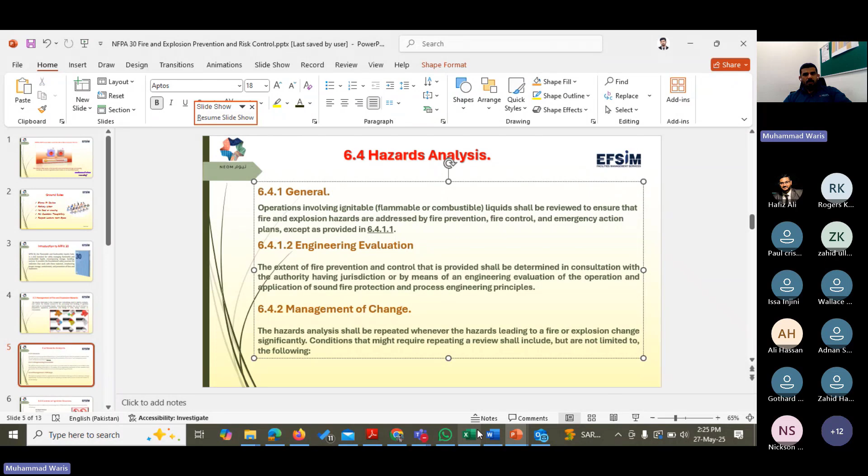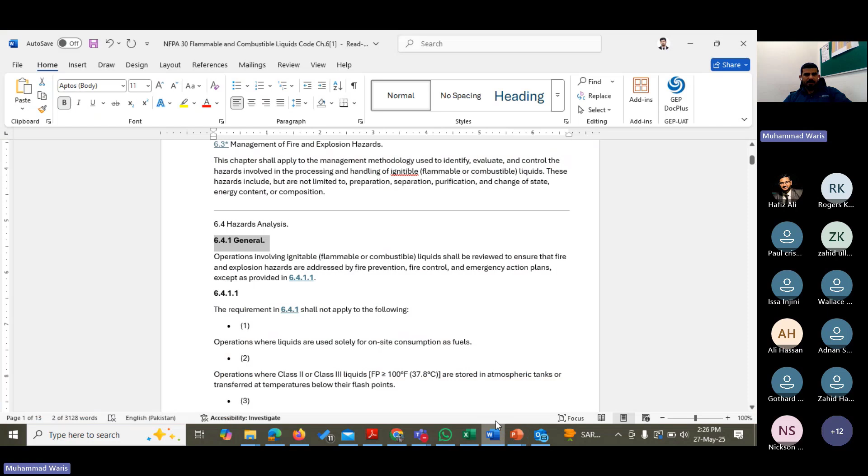6.4.1, General Hazard Analysis. We go to the book. Here is general hazard, 6.4.1. If you go to this point, you just click it and it will take you here. Okay, these are the requirements for this general hazard. You got it?

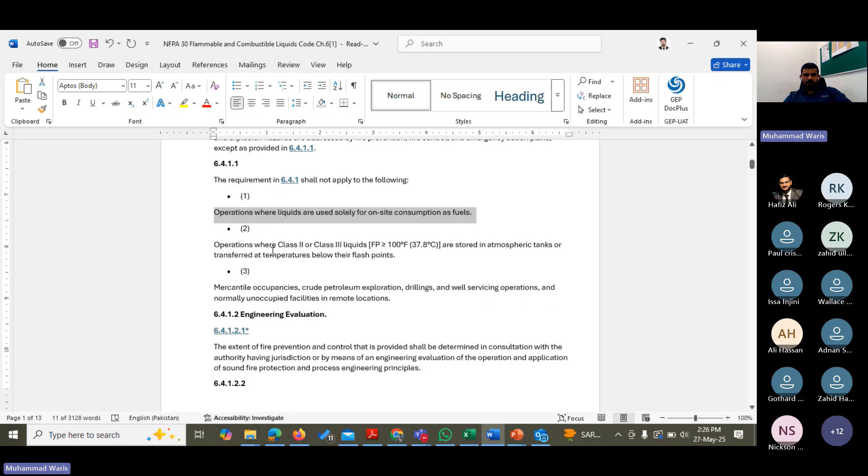So every table and flow we can understand from this, in every NFPA code, not only for 30, for every NFPA code.

Engineering evaluations: the extent of fire prevention and control that is provided shall be determined in consultation with the authority having jurisdiction, or by means of an engineering evaluation of the operation and application of sound fire protection and process engineering principles. I mean, the hazard analysis and engineering evaluation should be done before construction. There is a plan for protection systems, identification, risk assessment—each and every should be done judiciously and on engineering evaluation, because they have to make the plan for hazard analysis.

And this also impacts on something notorious. We received a message from an HSE manager that his client says we need to install a fire damper in our kitchen. Is it required or not required?

Now, this is engineering evaluation—this thing should be installed during construction. That's why engineering evaluation always impacts accidents and also impacts prevention. If there is an incident because of this fire damper, then this should be considered an engineering failure. You got my point, hopefully.

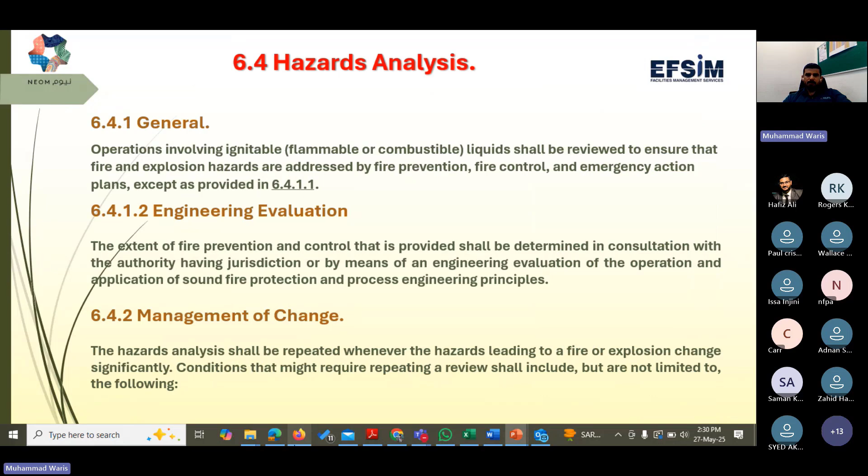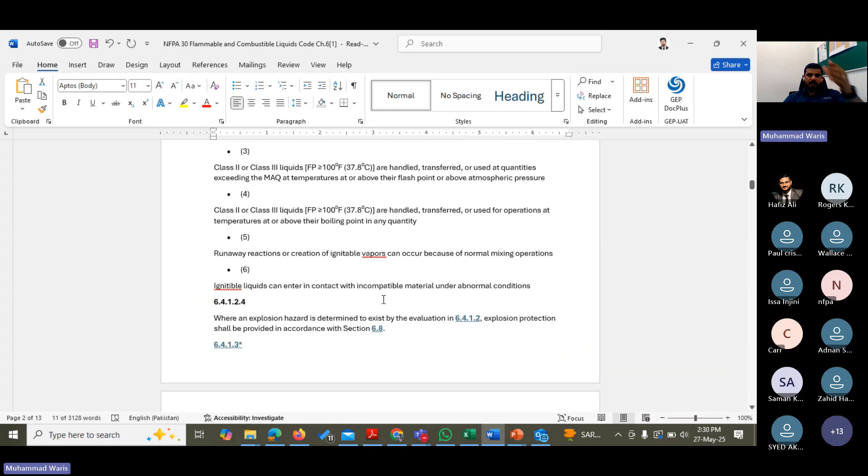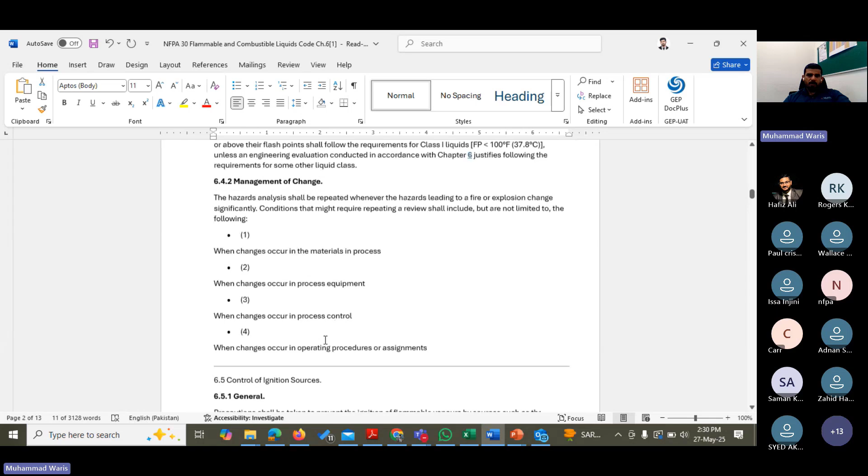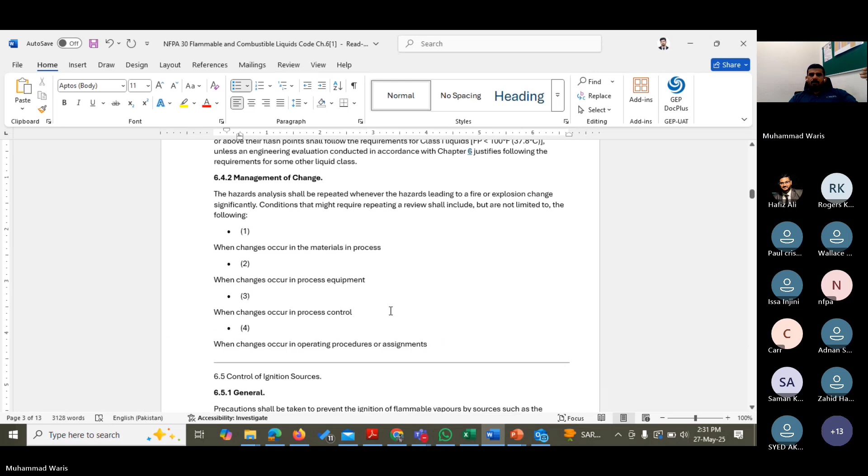Management of change is when change occurs in the material, process, when change occurs in the process equipment, when change occurs in the process control, when change occurs in the operational procedure and assignment. If change occurs in these things, there should be an impact on your industry, your hotel, and your control of ignition sources.

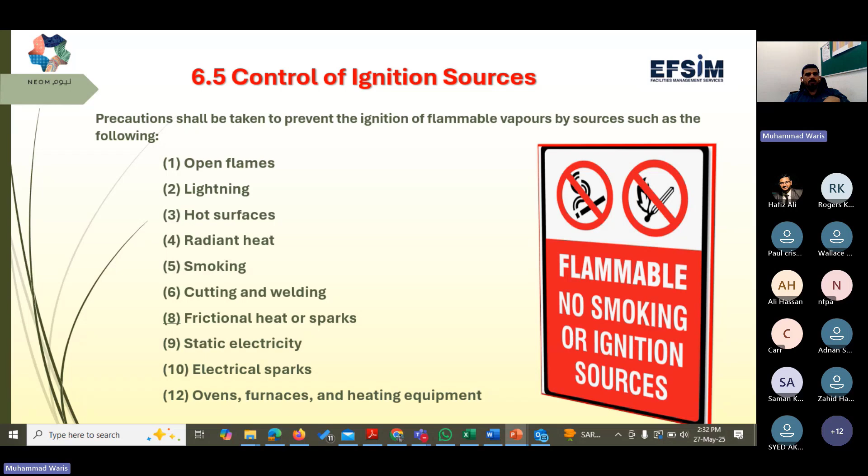How can we control ignition sources? What are the precautions taken to prevent ignition of a flammable vapor by sources such as the following: open flame—we have to control the open flame. You have to know where open flame has been trimmed, like for job work, stoves, kitchen areas, lightning, hot surfaces, radiant heat, smoking, cutting and welding, frictional heat, friction or spark, static electricity generated by friction, electrical spark, ovens, furnaces, and heating equipment utilized in different places. These are all the things we have to control as sources.

What is hot work? If anyone doesn't understand: welding, cutting, and every work regarding hot work—welding, cutting, and similar spark-producing operations—shall not be permitted in areas containing flammable liquids under 37 Celsius until written permit.

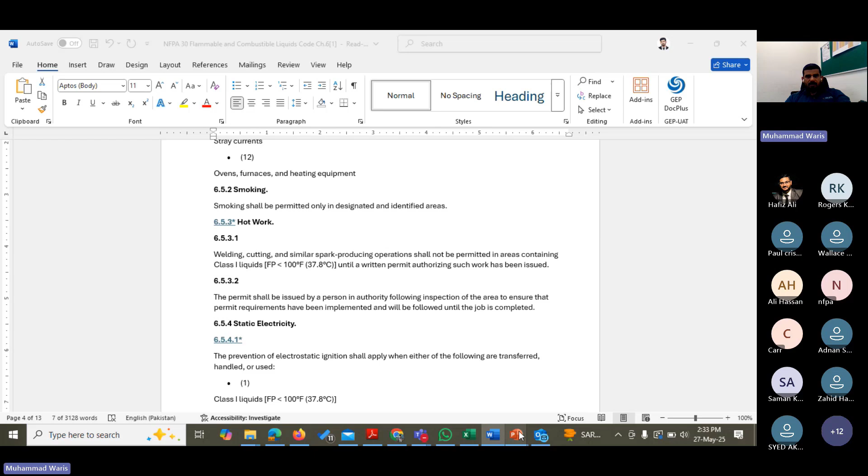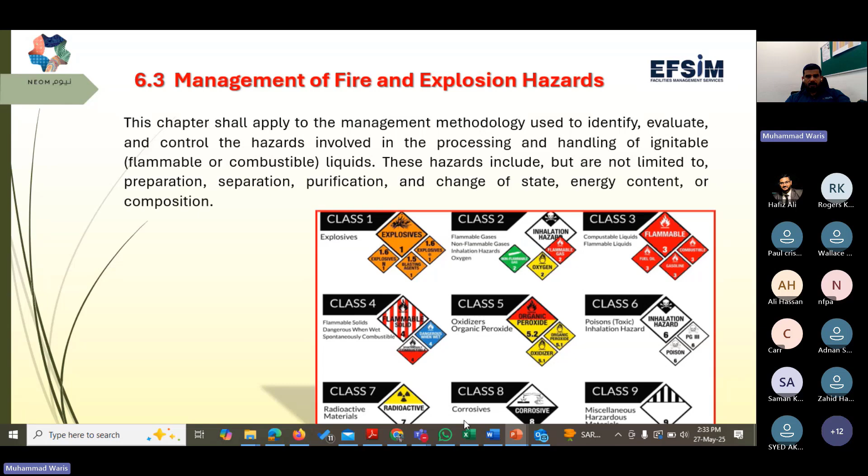So, if you want to learn about the table, this is a very good example in front of us. Just click on—which one? Class 1. So this is Class 1, Class 1 liquid.

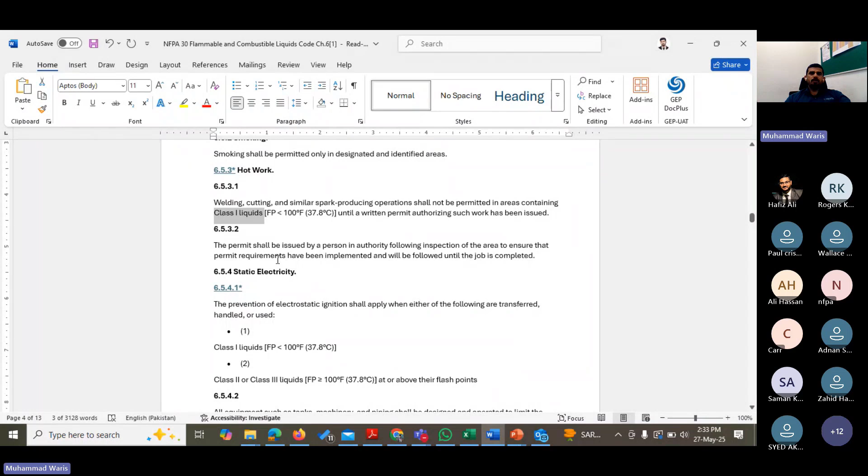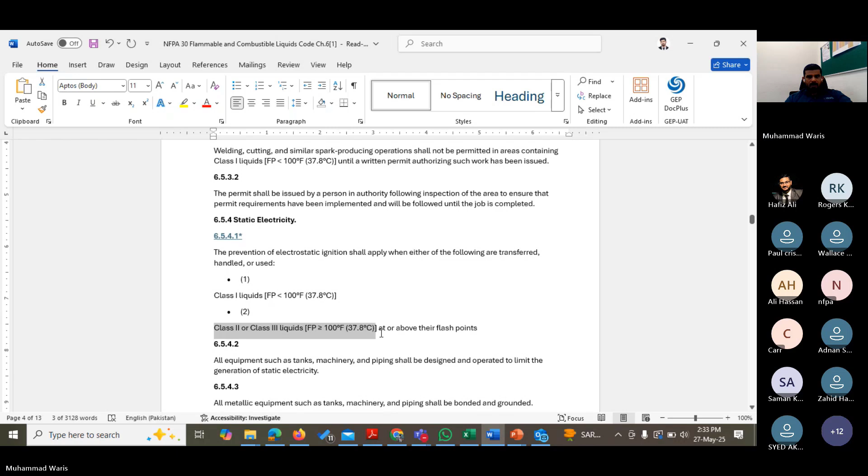All explosive, combustible, and flammable liquids are divided into 9 classes. These 9 classes can be used everywhere, not only in America, but all over the world. Same here, he shows you Class 2 or Class 3 liquids are above their flash point. You have just seen, sir, hand there, right?

Sir, kindly give us some examples of static electricity.

We have equipment such as tanks, machinery, and piping which shall be designed and operated to limit the generation of static electricity. Static electricity is found in areas where mostly metal has been utilized, so the metal used in these areas should be protected. Equipment like machinery and piping should be designed and operated to limit static, or we can go with PVC.

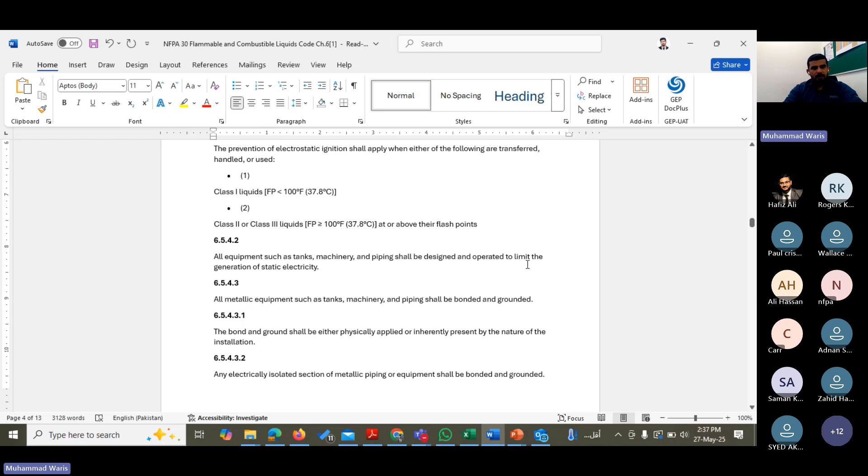Detection and alarm system and procedure. Remember we are discussing only flammable and combustible liquids. This topic only covers NFPA code 30, flammable and combustible liquids, handling, procedures, safety, and their prevention. So for these flammable and combustible liquids, what kind of detection system do we install? I have a question here: can anybody tell me what is the best detection system for flammable liquid and combustible material?

We are now on the slide about detection and alarm systems and procedures. Now we are going to prevention systems for flammable liquid and combustible materials. What is the best extinguisher system for flammable liquid and combustible materials?

Sir, we can use DCP, dry chemical powder. No, no, no, you have to answer only one, sir, choose the best one.

Sir, if flammable liquids and combustible materials are stored in a closed container or warehouse, we may install a sprinkler system like FM 200 gas or other water sprinkler systems for combustible materials, and for flammable we use FM 200 gas, which is environment friendly and extinguishes the fire by cooling.

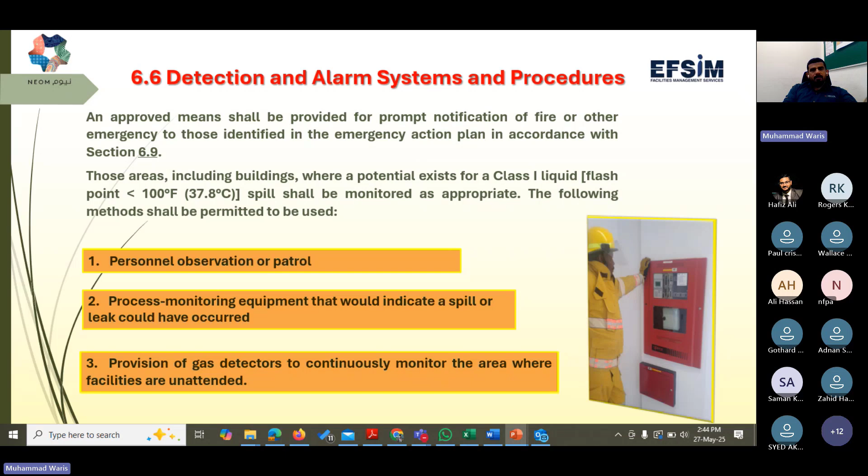So these are the steps: first of all, personnel observation, meaning you have manpower, you send a person to visually check everything out. Install process monitoring equipment, because the gas detection system or smoke and heat detection system is the third or final method, which can only indicate when something is already going wrong, meaning gas is released, fire has happened, or smoke is initiated, so they can activate your alarm system.

Next topic is related to fire detection system. What kind of fire protection and suppression system do we install? Yeah, that is the question. We can also find your answer from this slide.

This section identifies and recognizes fire protection and fire suppression systems and methods used to prevent or minimize loss from fire or explosion in ignitable, flammable, combustible liquid processing facilities. The application of one or a combination of these systems and methods, as well as the use of fire resistant materials, shall be determined in accordance with section 6.3 and 6.4.

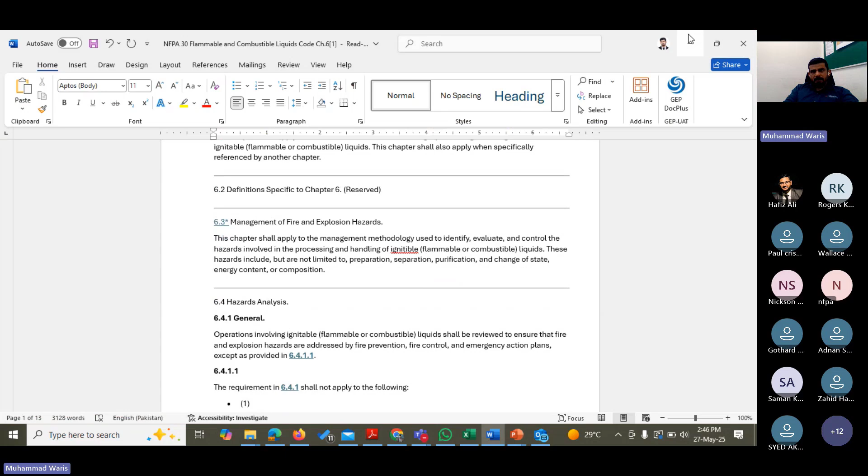What protection system can we install in that area that is suitable for that location? Section 6.7.2 says a reliable water supply or suitable fire control agent shall be available in pressure and quantity to meet the demand indicated by the specific hazard.

First of all, we have to understand the hazard - what kind of hazard and what kind of material is installed in that warehouse or location. I mean, there is some kind of chemical in that warehouse or industry or location. So, is water suitable for it? No, water is not suitable.

Is DCP suitable for it? No, DCP is not suitable either. So we have to choose the best extinguishing agent as per the type of class. Which class? I already showed you the table.

So this table is most important for you. You have to remember this table - what materials, what flammable liquids are in it, and what class they belong to. From that table, you know the reactivity, flammability, and toxicity of that flammable liquid.

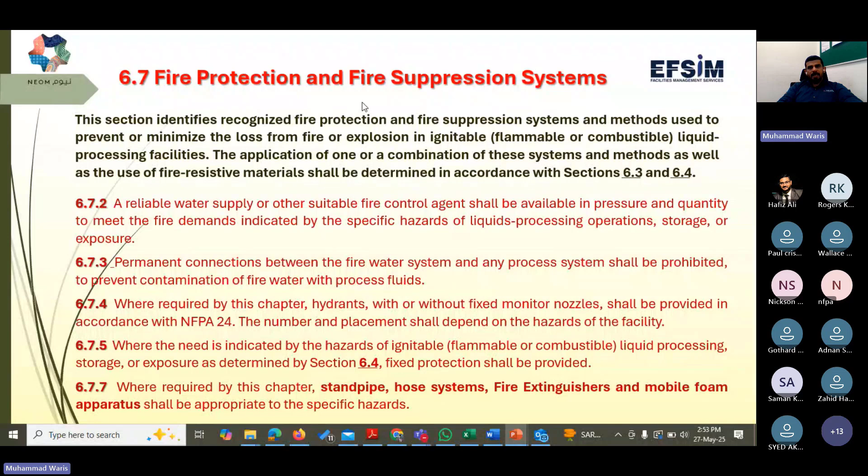You also have examples that a lot of persons died and nothing has remained of that industry. So this explosion protection system is a part of this industry that they should have to install. We are discussing fire protection and suppression systems, and this is also part of the fire protection systems. Industrial explosion protection system, IEP system - you can search it from Google, no problem.

Where required by the engineering evaluation specified in 6.4.1.2, or where otherwise provided explosion protection system, it shall incorporate one or more of the following methods of protection. And what are the following methods? You can check it.

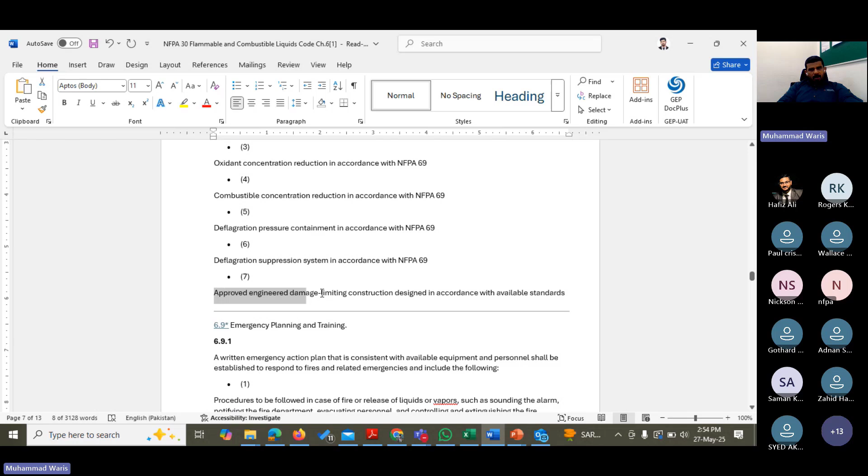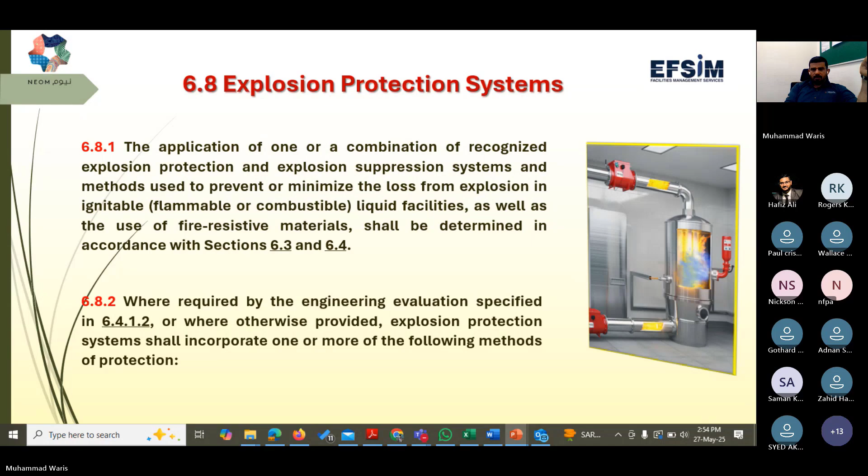When you are going to read NFPA codes, just remember one thing: we cannot add any word from our side. That was, you can say, the process of NFPA, or they don't want to share their internal information with anyone, any country. So maybe they have added everything with clause, with code, with table, because no one can change it itself. So we have to follow that code.

What kind of emergency planning and training do we need when we are handling, shifting, storing flammable and combustible materials? First of all, we have a written emergency action plan. Every industry, every multi-story building, every place must have a written emergency action plan - in case of emergency, what would they do?

That consists of availability of equipment and personnel established to respond to fire and related emergency. Like in case of emergency, what is the responsibility? Who is the person to evacuate that area? Who is responsible for the fire? Who is responsible for the gas leakage? Who is responsible for the water leakage? Who is responsible for headcount? Each and everything is written in that emergency plan. So what is the procedure? We have to follow these points.

Procedure to be followed in case of fire or release of liquid vapors, such as sounding the alarm, notifying the fire department, evacuating personnel, and controlling and extinguishing the fire. The procedure should include all these things.

Planning of effective fire control measures shall be coordinated with local emergency response agencies. When you are going to plan an emergency action plan, you should involve local authorities and industries. Like here we are in NEOM - in NEOM, we have an emergency action plan, but we have coordination with civil defense, with health ministry, with public safety, and with fire departments. In case of emergency, we coordinate with them.

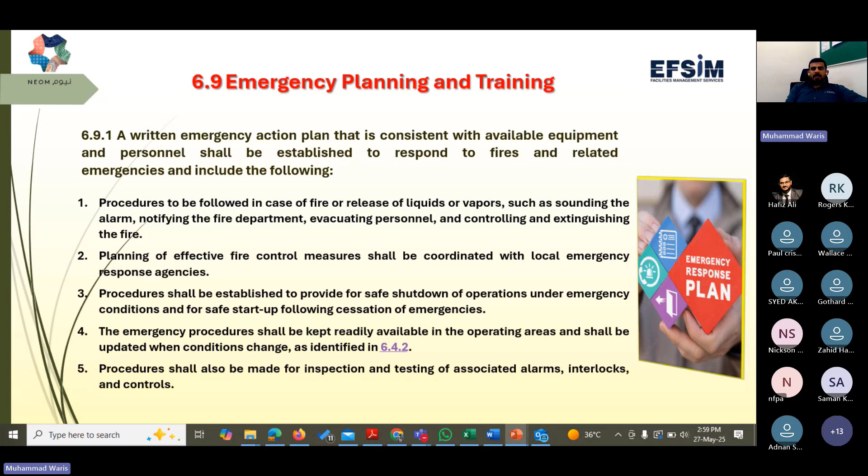Procedure should also be made for inspection and testing of associated alarms, interlocks, and control systems. There should also be a procedure that shows that monthly, quarterly, biannually, or annually, inspection, testing, and maintenance has been going on for all fire protection and firefighting equipment and procedure systems.

Inspection and maintenance, 6.10: All fire protection equipment shall be properly maintained and periodically inspected. I already told you what the criteria are for inspection and testing - like quarterly, monthly, or biannually.

So water-based fire protection shall be inspected, tested, and maintained. What is the point we are discussing? The point of maintenance and operating practices shall be established and implemented to prevent and control leakage and spillage of ignitable liquids - maintenance and operating practices. In case of spillage or leakage, what is the handling procedure?

Yes, please sir. First of all, if we have a spill or leakage, our first priority should be to save people, property, and the environment, and the methods we can use for this leakage or spill control.

That may be absorption, and blanketing or covering we can also use. After that we can make dams, diking, diversion, or retention as per the situation. As per the situation, this mostly impacts - what is the situation at that time?

What is the hazardous material we are going to handle? What kind of liquid has been drained? What kind of PPE do we require? What is the flashpoint of that liquid? Every point is most important, that we have to decide before we control and before we contain this liquid, okay.

Okay, thank you. These points mentioned here are regarding inspection and maintenance of the areas and locations where we install combustible and flammable liquids. You can read it, and if you have a query, you can ask the question later.

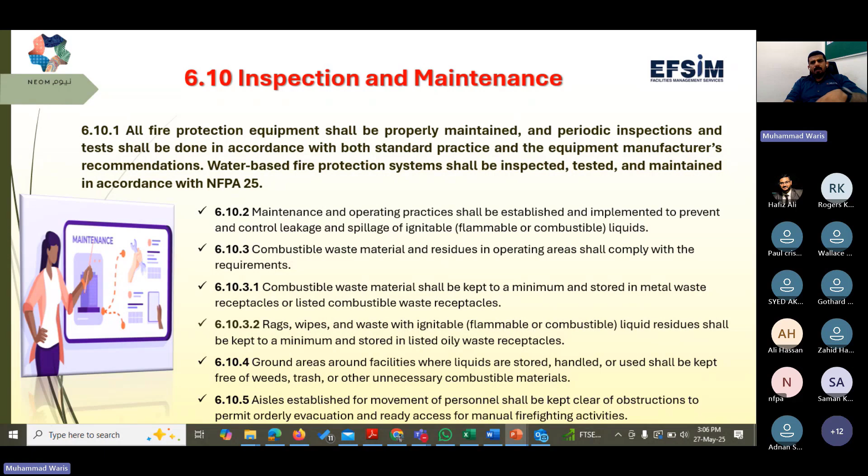This slide explains the drainages, where we can drain our chemicals, the extra chemical. We have a lot of examples in our country also, where chemical has been going to drains and canals, and everywhere, and seas also. You can see them draining into the sea, and water lines everywhere.

So in this slide we discuss that we cannot drain this liquid and chemical into our usable water, into our lines, or into our environment. Got it? Only designing that will control, decontaminate, and drainage that has been made specially for these liquids and these chemicals.

Design intent - what's design? The facility shall be designed and operated to prevent the discharge of liquid to public waterway, public sewers, or adjoining property, as determined by regulatory requirement and the requirements of section 6.12. That only be required and made for this liquid should be drained or discharged that way, not into the public waterway.

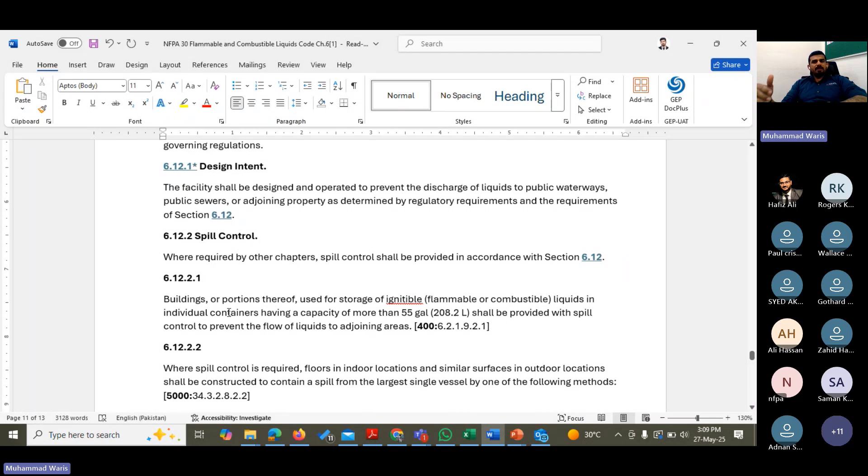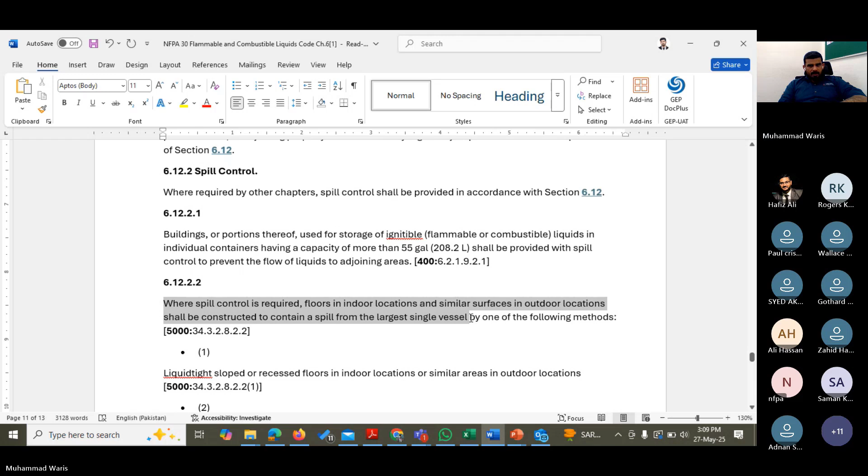Where spill control is required, floor in indoor locations and similar surfaces in outdoor locations shall be constructed to contain a spill from the largest single vessel by one of the following methods. So if we are going to follow the method, we can get this law and table from NFPA 30. You can only focus on the building or portions thereof that are used to store liquid, whereas the capacity of individual vessel exceeds.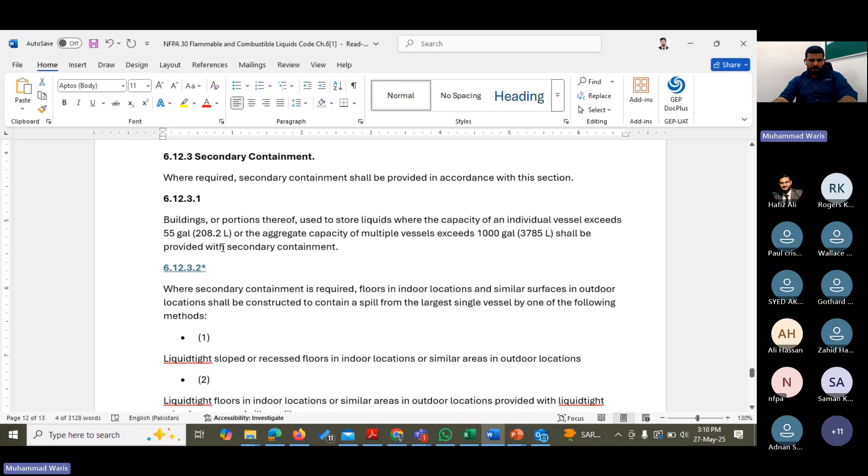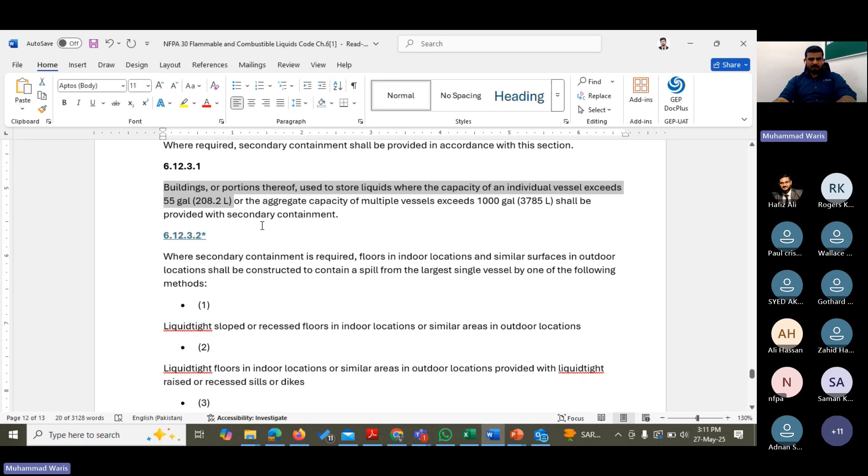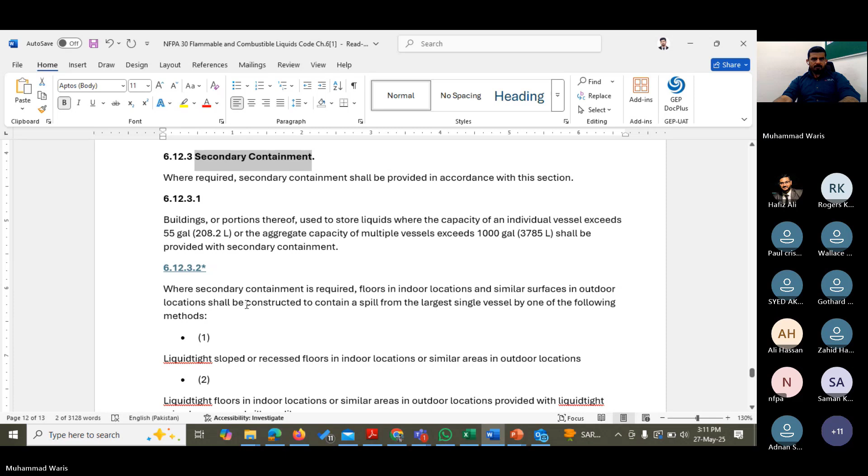We already discussed this, I think. Same is actually same for spill and same for secondary containment. Where secondary containment is required, floor in the indoor location and similar surface in outdoor location shall be constructed to contain a spill from the largest. These are the same methods used for the spill control and he's choosing for the secondary containment.

Drainages. If drainage is used, it shall meet the requirement of section 6.12, where a drainage system is used to remove liquid from the fire area. It shall direct liquid leakage and fire protection water to an approved safe location without creating any additional exposure hazard. Drainage system, he is choosing, he says that it should be a direct liquid leakage system. Fire protection water to an approved safe location, if there is no other link line with it, only that liquid line should be

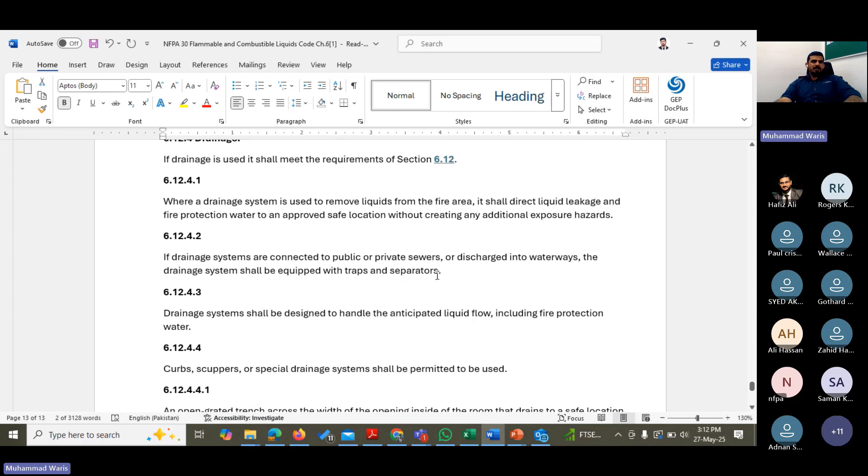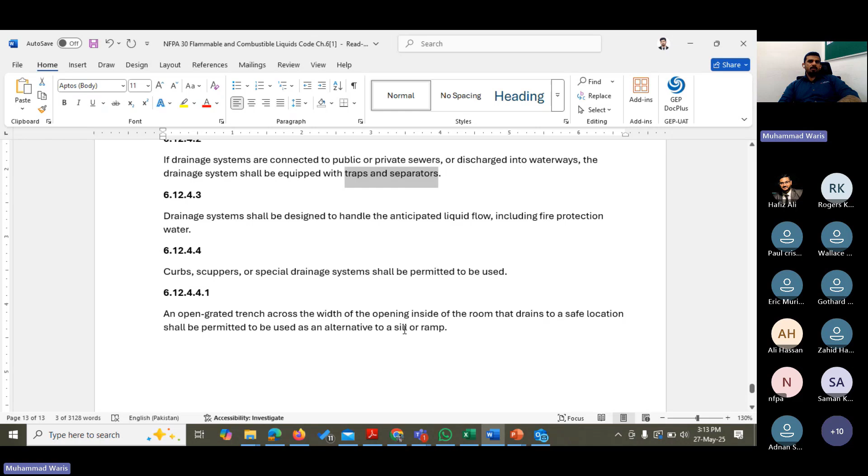extracted from that drainage. If drainage systems are connected to public or private sewer or discharge into waterways, the drainage system shall be equipped with traps and separators. There should be a different drainage system designed to handle the anticipated liquid flow, including fire protection water. Curbs, scuppers, or special drainage systems shall be permitted to be used. An open-grated trench across the width of the opening inside of the room that drains to a safe location shall be permitted as an alternative to a sill or ramp. These are the points for drainages.

In conclusion of this slide, again I'll tell you how we can drain the liquids and chemicals from our premises. In the industry we're working, there will be a lot of chemicals and wastage, chemical wastage and medical wastage. Sometimes also the drain wastage that has been contaminated with the chemicals and medicine. So the line should be different.

Line should be fire protected, different line from others. Do not mix with private lines and water supply lines and the government lines. If it is going to mix with them, there should be a separate line with color coding also. So this slide is covering only this portion. It's a little bit complicated, but please try to understand the wording, and if you have a query, please ask me, we can discuss it.

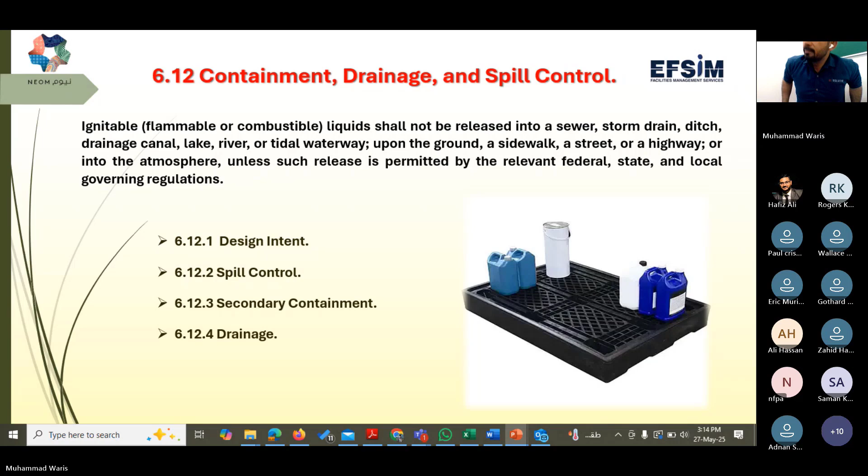It's a special team for this purpose. They handle this leak where they have suction machines for it. They use suction machines to transfer this liquid into a tank, and they can transfer it from the area. After that area is cleared, they put a rag on it and also wash that area with water. If water is not usable, like if the chemical has reacted with water, they can use AFFF. If AFFF cannot be used, they can use another liquid to clean that area.

Calvin is asking how is the explosion protection system triggered or activated? Calvin, explosion protection systems are triggered by detecting an increase in pressure or heat, which then activates the suppression mechanism that releases a suppressing agent like dry powder, liquid detergent, or special chemicals. You are talking about the detection system, yeah, protection system or trigger system. Yes sir, I have got it.

Okay Calvin, listen again. The protection system we are choosing for that explosion system, exposure area, I mean you're asking how is the explosion protection? Explosion protection system is like our protection systems installed in different areas. Like in our MEP store, there is FM200 installed, for the exposure area of that area, where there is a possibility of explosion. Understand? First we have to understand what kind of explosion area we have that may have a chance of explosion.